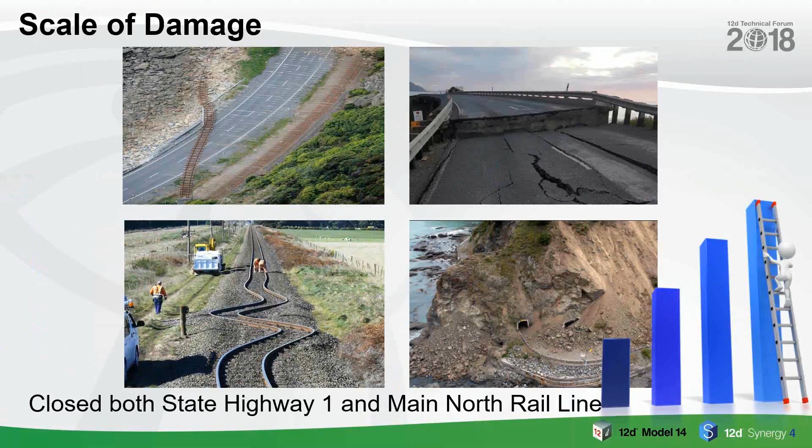You can see there just how much the railway lines were twisted, and down the bottom how the road and the rail tunnels were just decimated.

The response was fantastic. All the different groups came together to actually respond to the earthquake, and the North Canterbury Transport Infrastructure Recovery, or Nectar, was formed to look after it. It's a little bit like SCIRT from the Christchurch earthquake, except this time it was concentrated north of Christchurch. All these groups came together to form Nectar to actually do the redesign and rebuild.

They first built a village which could house about 300 people, with the ability to increase it, but there were about 5,000 people involved altogether.

They had to do things like cleaning up all the tops of the slips, clear away the slips, retain slips from blocked roads and rail, and repair and reconstruct the rail and road corridors. First they had to get these things open so that they could even start getting there to work on them.

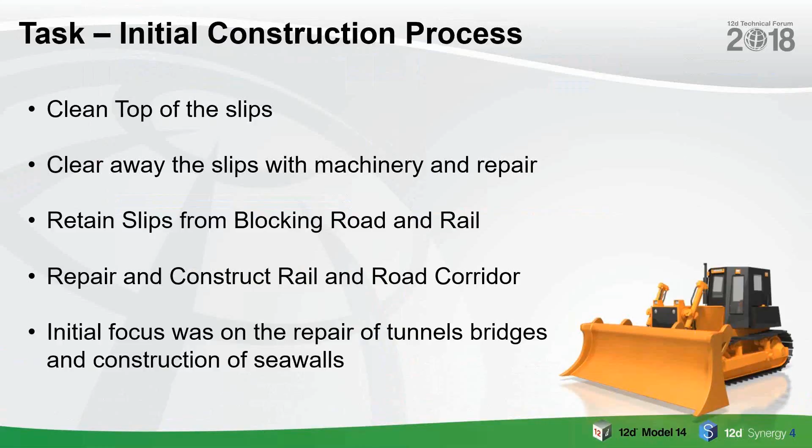Amazing sorts of things they had to do. And here's a clip to see just how hard it is these people had to work.

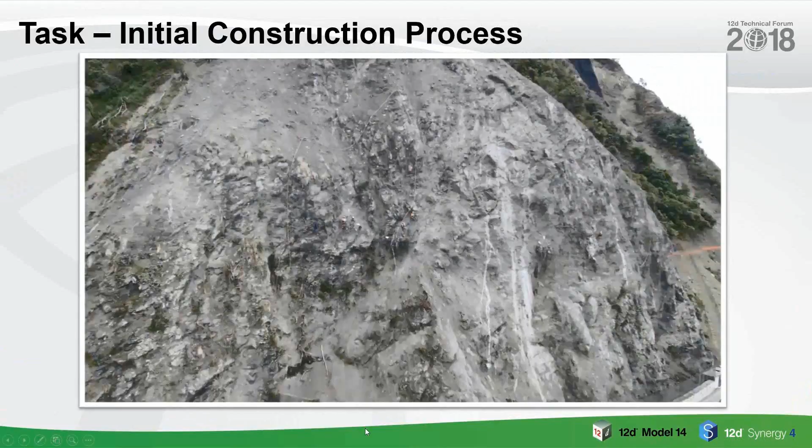So these are the sorts of things and hazardous ways they had to deal with just to start off before they could do anything. There were 200 areas affected.

700,000 cubic metres of soil to be moved, 30 slips. The main rail network was actually cut, and along that line there were 900 sites that sustained damage, including 20 tunnels, 59 bridges, and a whole lot of embankments as well.

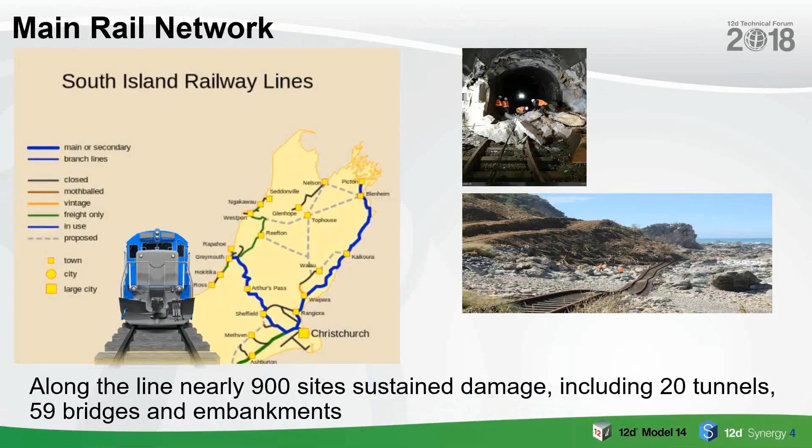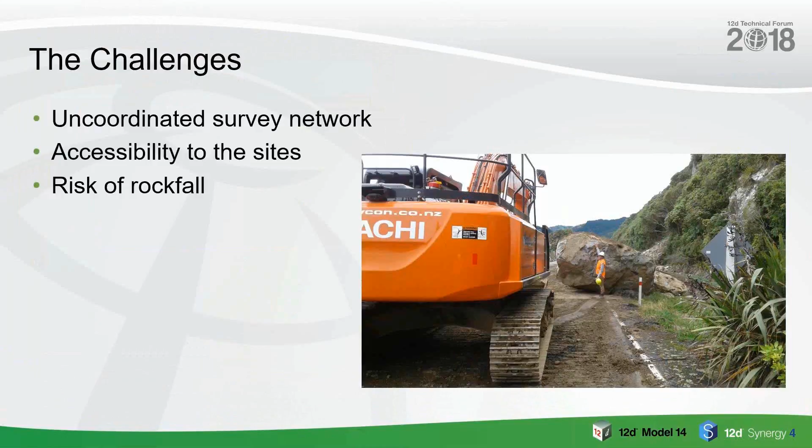You can see there just how bad the tunnel and the rail were. The challenges were basically uncoordinated survey networks, accessibility to the sites, the risk of rockfall on the sides of the mountains, how to actually capture the terrain to even plan anything, and how to manage and distribute all the data for it.

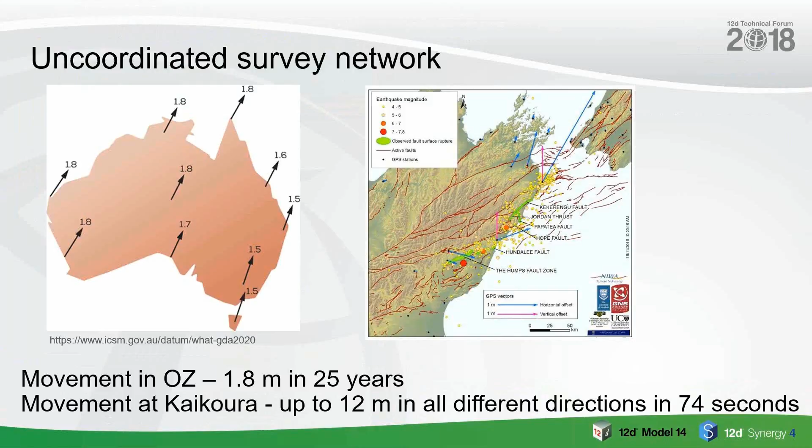For those in Australia, we talk about movements in Australia, and we've moved 1.8 metres in 25 years, that's with continental drift. At Kaikoura, they moved up to 12 metres in all different directions in 74 seconds. So that gives you some idea of the magnitude of the earthquake.

To capture the terrain, they used a whole combination of aerial laser scanning, traditional total stations, GPS, mobile laser scanning, ground-based laser scanning, hydrographic surveys, because a lot of this went into the water, and UAV photogrammetry. So they used the full gamut of tools.

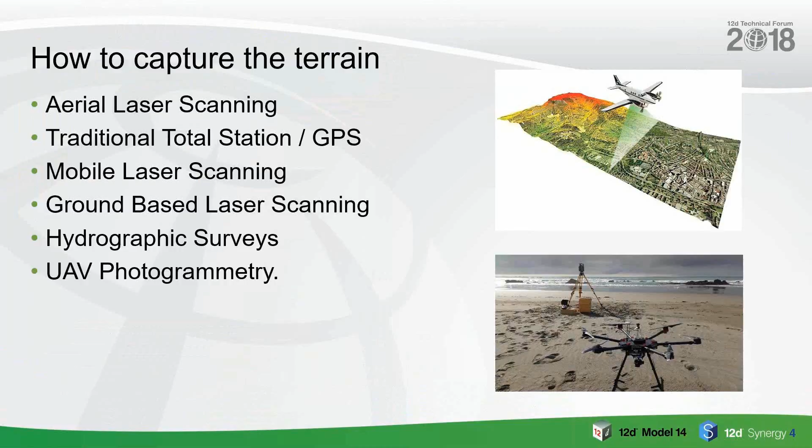There's a whole lot of examples of what they did, and they brought all this data into 12D model to model everything up to start the design.

As far as the data, they thought about a network drive, but it was difficult to use. It was remote, and you could not run a real DMS. So they actually chose 12D Synergy to manage and distribute all the data for the project.

They had the 12D model data, the Office products, AutoCAD drawings, and also PDFs. The Nectar Synergy system had 240 plus users, 1,200 jobs in it and this is ongoing, 600 odd 12D model projects, 1.1 million files, 1.8 million file changes on those million files, and 4 terabytes of file changes.

So it was a very large system.

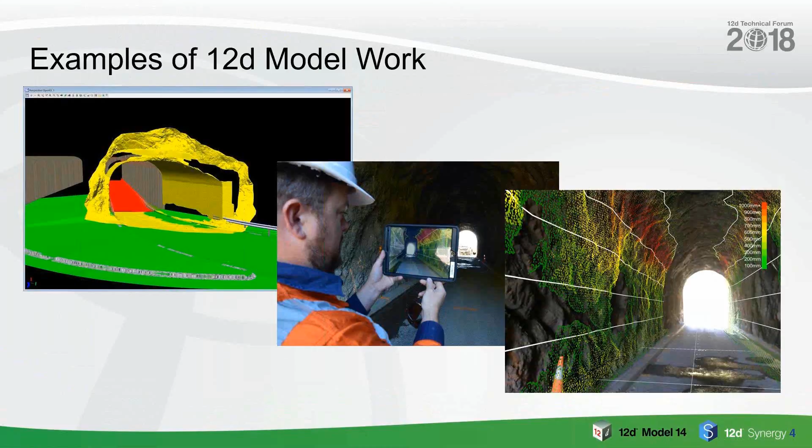The sorts of things they did is they bring all this data together and use 12D model to model and construct the jobs. Amazing things were done there.

An example here is just a fast bridge. It was the fastest multi-span bridge to be constructed in New Zealand, a 7-span, 144 metre Irongate bridge constructed from the ground up in just 14 weeks.

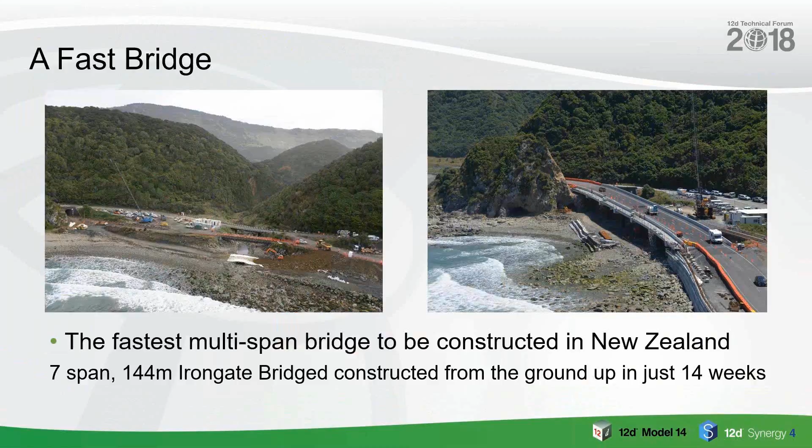At one point the NCTIR project was consuming all of the available cement in New Zealand. So it gives you some idea of the scale.

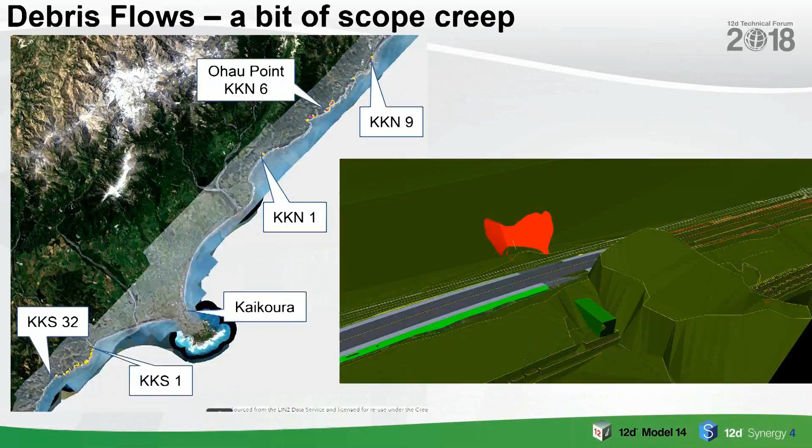On the administration side, all this debris flow down had to be modelled and allowed for. So a huge amount of data and material came down.

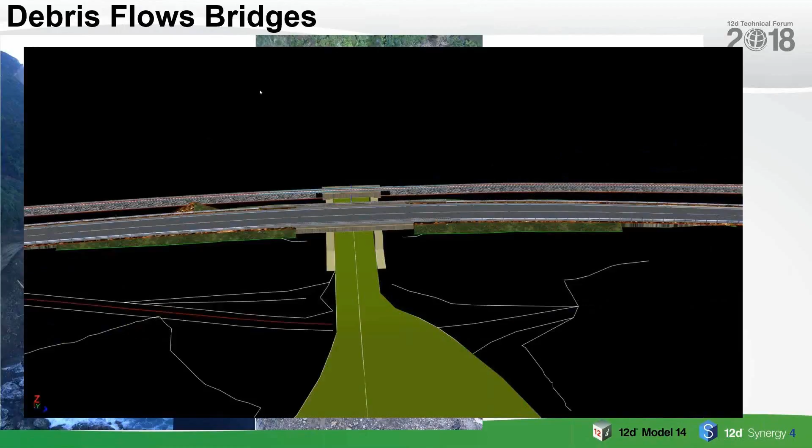They had to do a lot of flows for bridges just to make sure it wasn't going to happen in the future, because a lot of this rock and material was sitting there but was going to come down over the next 20 years. So that all had to be allowed for as well. So they modelled all these things up inside 12D model.

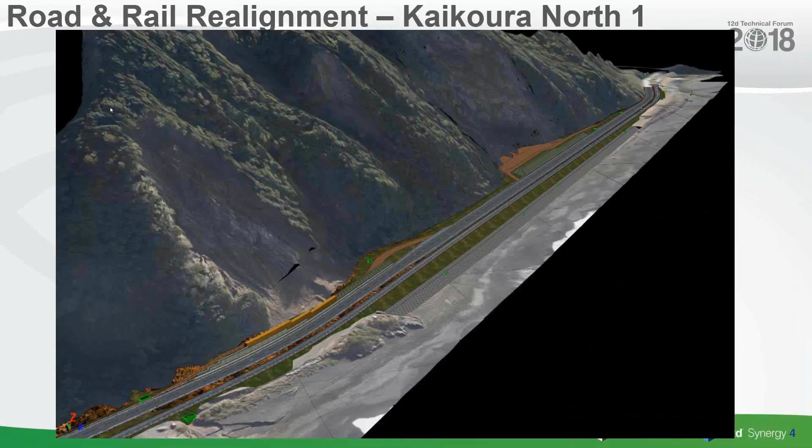The road and the rail were right next to each other at many points, so they all had to be realigned. And actually some of the rail was done first, so then the road had to fit in around it. So it was not an easy job. A lot of these things coincided and had to be looked at together.

Here's an example where you see you've got your road, then your rail, and then the ocean's just on the other side, and huge, huge cliffs.

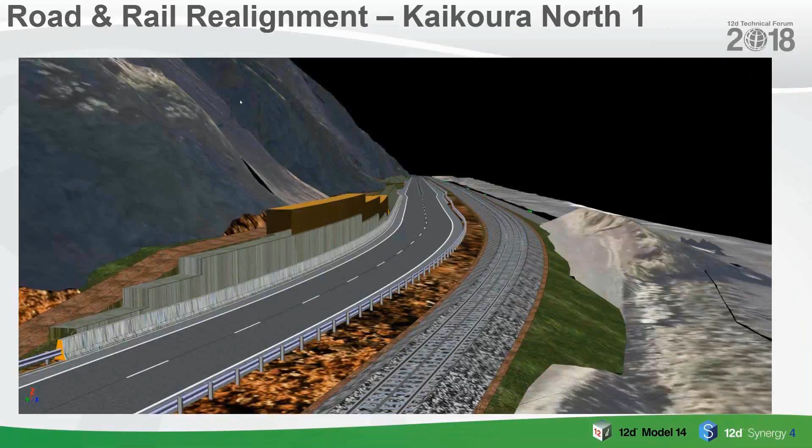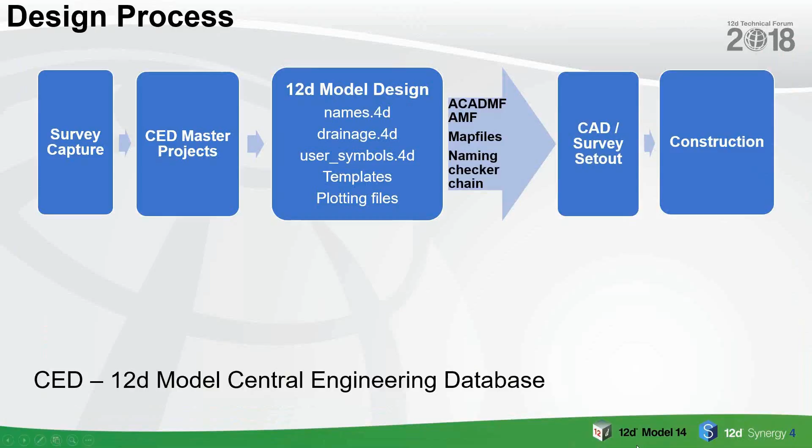For the project, they used what we call the CED master projects - the 12D model central engineering database. So all the survey went into there, and then the people doing their design were putting all their projects in and out of the CED master database. Using various things like mapping files, the data was going out to survey, to be set out, and then onto construction. So the CED central database had all the models, 12D model projects in it.

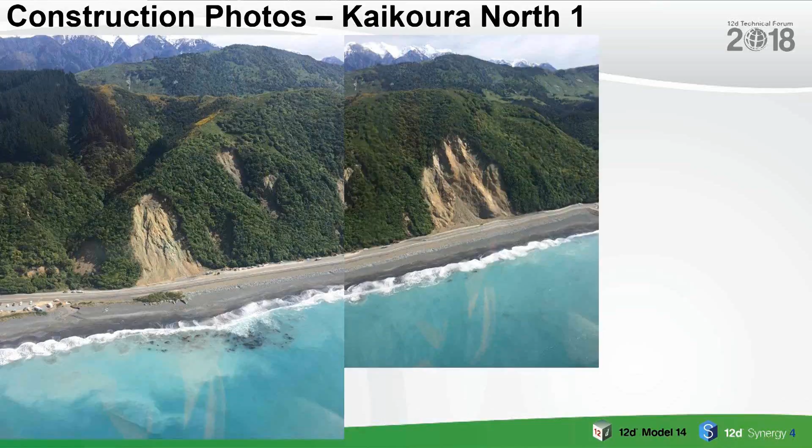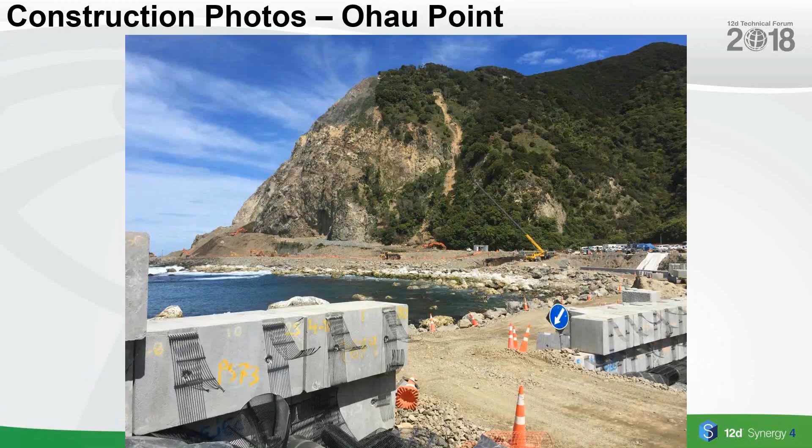Here's just a bit of a visualization of what they were actually working with - huge areas of construction. You can see some of these, where you can just see the size of the things down there and the people and dongas, just how massive it was that they're working on. So not an easy task at all, tremendous cliffs and things to work with.

So basically the earthquake was on the 14th of November 2016, and their big challenge was to safely open the harbour, road and rail for public access. On the 17th of September, the railway was actually opening and running again, so about just under a year later. The harbour was open on the 14th of November 2017, and on the 15th of December 2017, they started having traffic flowing on the main road. So it was a tremendous achievement in just over a year. But still, there's another year and a half to go of design and construction to complete it. So it's a massive, massive undertaking.

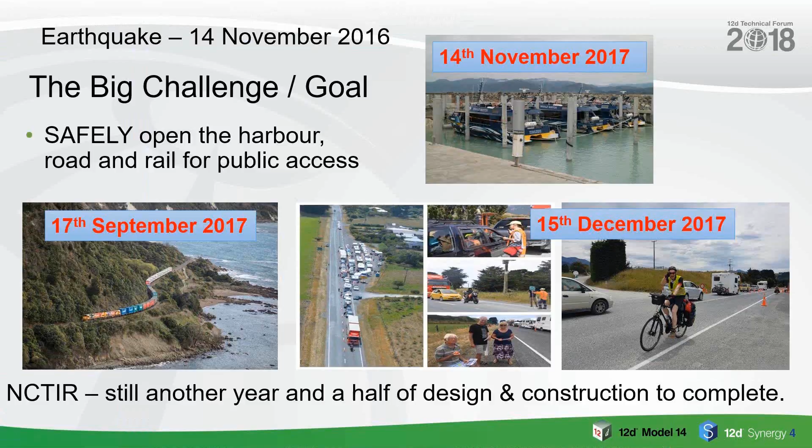It was a fantastic talk that the guys gave.

Throughout the conference, a lot of it was on using 12D Synergy 3, what's coming in 12D Synergy 4, and using 12D Model 12, and what's coming in 12D Model 14. You'll notice there is no 12D Model 13, so you haven't missed anything - we're jumping from 12D Model 12 to 12D Model 14.

A common theme was producing civil BIM models in 12D model. Many of the talks were around producing civil BIM models and how useful 12D model was for doing that, and how it's about the only civil BIM product that is really on the market. And using 12D Synergy as a single source of truth for all this data, as a BIM repository for not just the 12D model data, but all the other things that go with a project.

Richard Stollier spoke about what's coming in 12D Synergy 4. This is in the first session. For those who didn't know, Synergy is a data management system for the AEC industry, so we concentrate on that area. It has easy to use work sharing capabilities, and reduced transfer times with intelligent data transfer. So you're working local, we're backing everything up in 12D Synergy, so you really are cutting down on the network traffic by a huge amount.

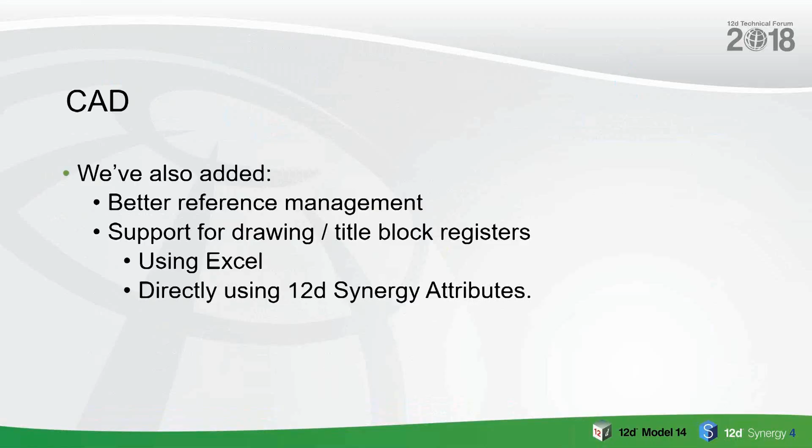In V3 we supported AutoCAD and BricsCAD, but now we've added Map 3D, Mechanical, Plant 3D and Civil 3D. We've also added support for more reference types, the sheet set manager and data shortcuts in Civil 3D. There's better reference management in CAD, support for drawing title block registers using Excel, or directly using 12D Synergy attributes rather than Excel.

There's a new workflow engine, which is all new for V4 - attributes so you can tell what stage a project is at, what revision a drawing is on, and so on. The workflow now allows you to model your business and day-to-day process and perform automatic operations. It's a point-and-click way of putting things together to let you decide what stage you can go to next and so on. People find that very, very useful for setting up things rather than just having to set attributes before.

Spatial maps: we could capture coordinates and things in V3, but now in V4 you can display maps using ArcGIS Online. So you can search for jobs using a bounding box, show surrounding jobs, pull in layers from external sources, and search for files near your current job. So you can actually see it there all on the screen, letting you know what's going on.

A whole lot of reports and gadgets, so things out of the box to show you license user activity, job details, file change information, and many more. You can also now schedule reports. So you've got these little gadgets you can see, so everyone can see what's going on straight away.

So basically 12D Synergy 4, it's smarter done smarter. We've taken a lot of the user feedback plus other things and added them in just to make it even better for you for the future. And with the CAD thing, we'll find a lot of people coming on board to use the CAD side of 12D Synergy, even if they're not using it for 12D Model.

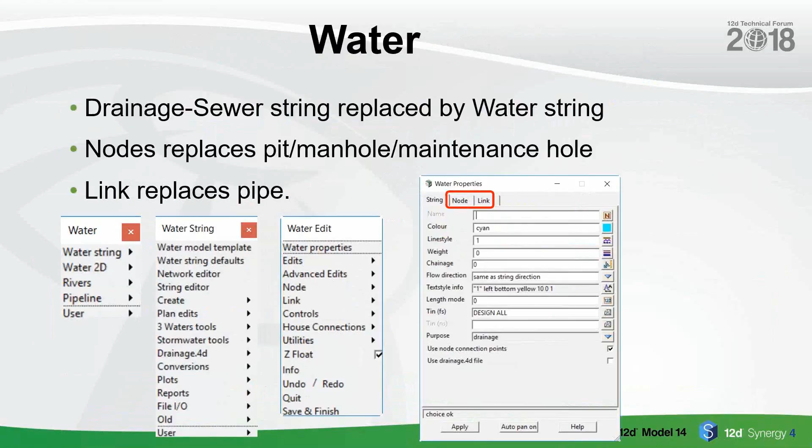With water, the drainage and sewer string has been replaced and called a water string, because it does the three things. And so you'll see that right through. The menus will be changing, and we're now using the word nodes instead of pit or manhole or maintenance hole, because there are things that just weren't covered by those. And link is replacing pipe, because it doesn't just have to be a pipe, it could be just a V-drain. So we've made that change of terminology just to make it easier to talk about things. So you'll see that right through all those menus.

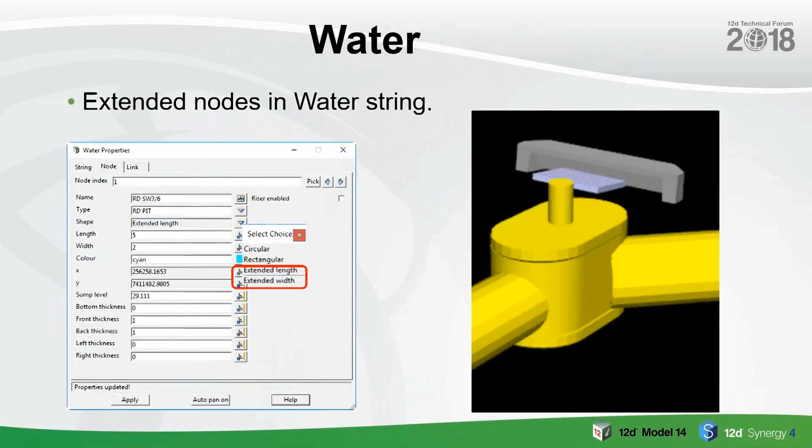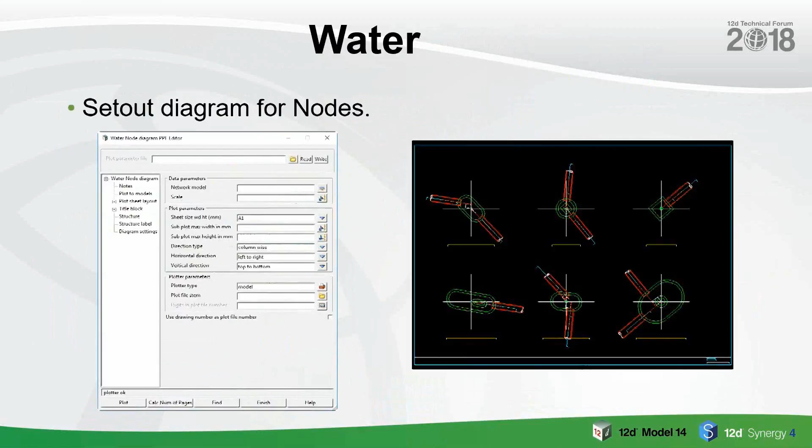We have extended nodes in water strings, so this is not just round and rectangular, but extended nodes. And we have risers for nodes in the water string. So you're now going to have a riser, so you can model it much more accurately. We have set-out diagrams for the nodes, so you can produce all those set-out diagrams you want for a selection of nodes or all your nodes. There are user-defined house connections and more settings for setting them. So everyone has been asking for that for a while.

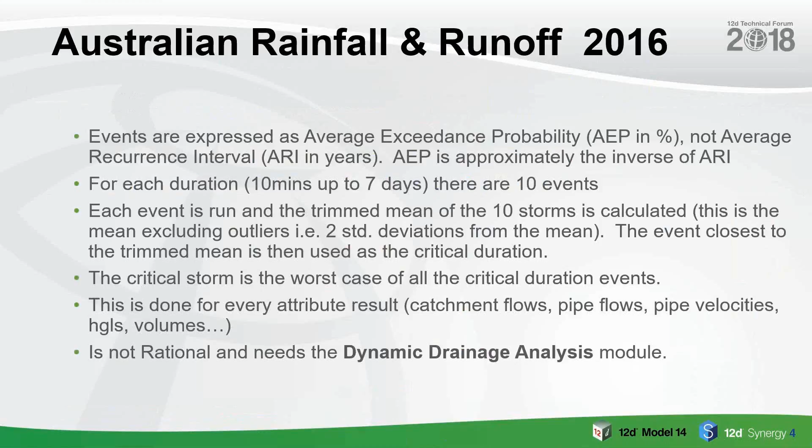We're supporting the Australian Rainfall and Runoff 2016, and most of you will know that if you're on maintenance, we actually pulled that back into 12D Model version 12 so that people can use it now. So if you've got C1 of version 12, you can run this now if you're on maintenance and have the drainage analysis module, that is. There's a new GPU usage for TUFLOW calculations, which can speed that up by like a factor of 10.

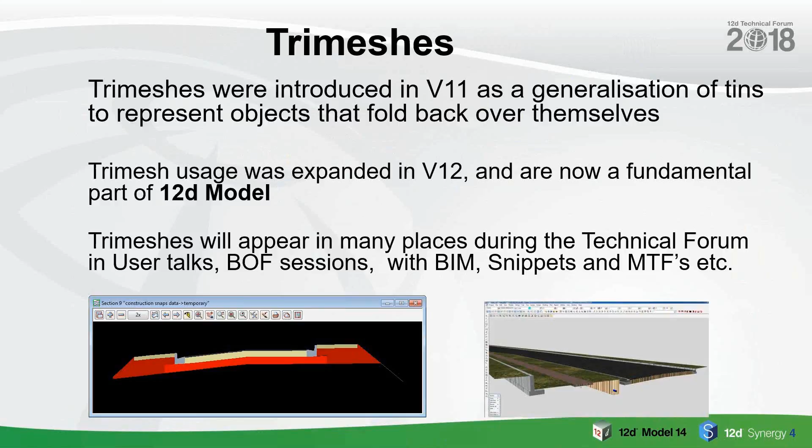Trimeshes, we introduced them in V11 as a generalization of tins to represent objects that fold back over themselves. And usage of trimeshes expanded in 12, and now they're a fundamental part of 12D Model. And in all the technical forum talks and other talks, BIM, snippets and so on, trimeshes are there all the time. So they're becoming a fundamental object inside 12D Model.

Because we have the trimeshes now with faces on them, we've introduced a new face snap. So you actually can click right onto a face. What that meant, we used to use F for fast snap. We're now going to call that quick snap and use a Q. So fast snap will now be called quick snap, and F will be for face snap.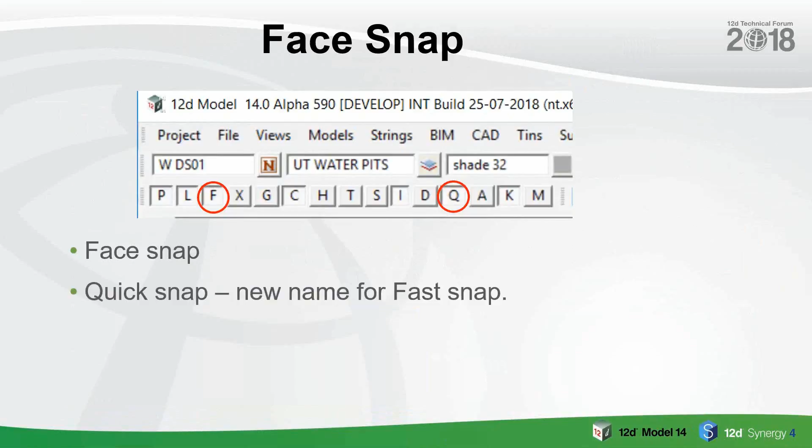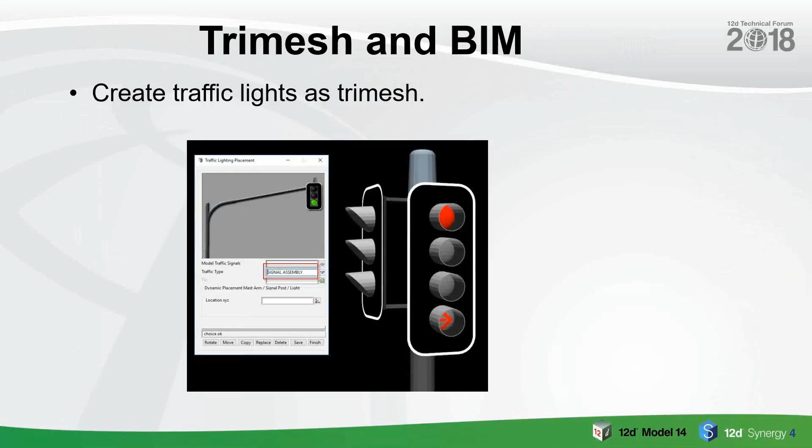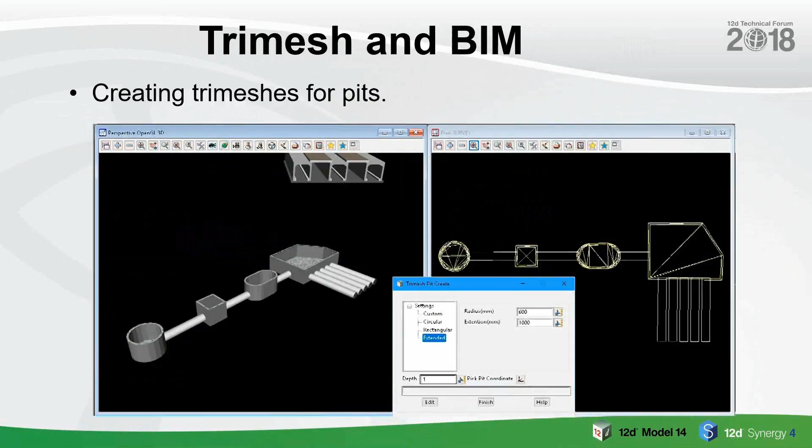For BIM, you can now create trimeshes for all sorts of things. You can do them as fences rather than extrusions. You can create traffic lights for them. Here's a case where we're creating trimeshes from a tunnel boring machine, the rings that are picked up afterwards from where it's going. Trimeshes for pits, for pipes, all sorts of things. Culverts along a string. A heap more things there of trimeshes for use in BIM or civil BIM.

And for tunnels, we had the MTF for producing tunnels. Now you can actually form the inner and outer walls of the trimesh as one trimesh. So that's, say, the yellow part. You can also have the inside of it for the volumes inside. So all these strings that make that are independently controlled in the MTF. And the commands can be for either vertical or perpendicular to super alignment, which is super important. Most systems don't allow that.

And we also can have invisible faces in there, so you can have it still closed even though it looks open, so you can get a volume for the inside, say, of the tunnel. And you can have invisible faces so you can see into the side passages and things. So it's really much, much easier to do proper civil tunnel work.

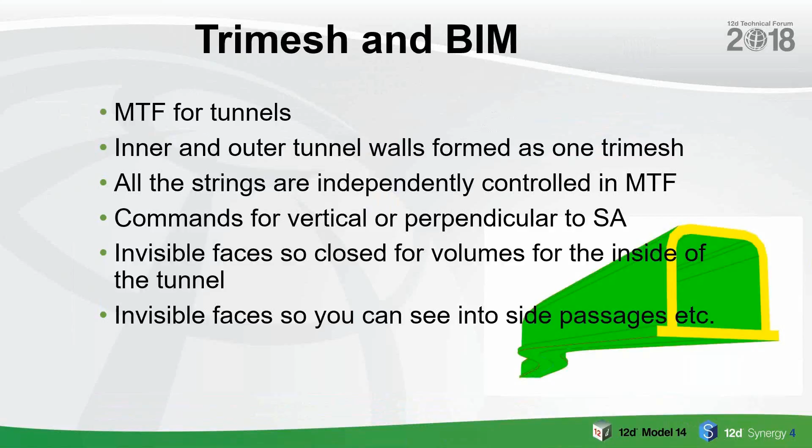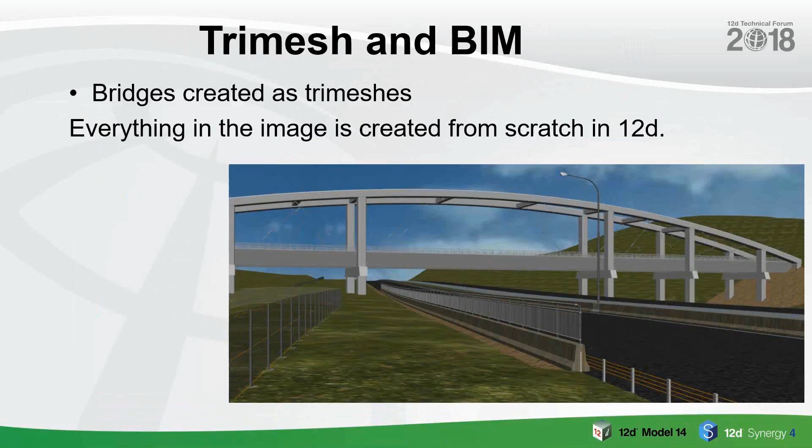Bridges can be created as trimeshes. In fact, everything in this image has been created from scratch inside 12D Model, either trimeshes, extrusions, or tins, and so on. So there's very little that you can't create in a civil BIM job inside 12D Model.

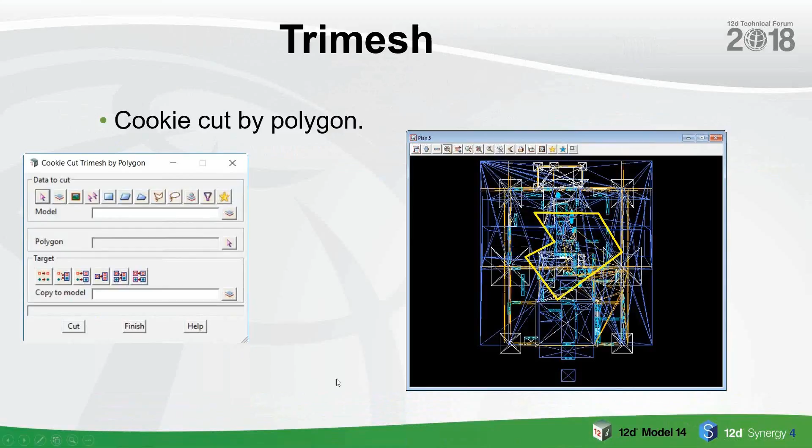There's also a Trimesh Editor, so we can edit vertices, edges or faces, so you can add, delete, move, make invisible and so on. There's also options in there for the union of trimeshes, the intersection of trimeshes or subtracting trimeshes one from another. A whole lot of things on trimeshes.

Another big thing there is project settings. This takes a lot of the things we had for defaults, water defaults, the things that started for a new project that you set up once at the new project, but then you save them away with each individual project. So they've all been brought together into the one place called project settings to make life much easier for you.

And in the case of the project settings, you can have files of them, so you can change it at any time. So you might have project settings set up for survey or design or water, and so you can change to those settings at any time within a current session of the project.

We've also combined the 12DA and 12DXML readers and writers, and they're now up on the file IO menu right at the very top. So you no longer have to hunt them down in two different places. They recognize, and you can say which one you're writing out, as well as all the zip ones, and it looks for them when you go to read them in. And also there's these anonymous functions. You can now set them right there on most of these read panels, whether you want an anonymous function for them or not. It's not just one environment variable.

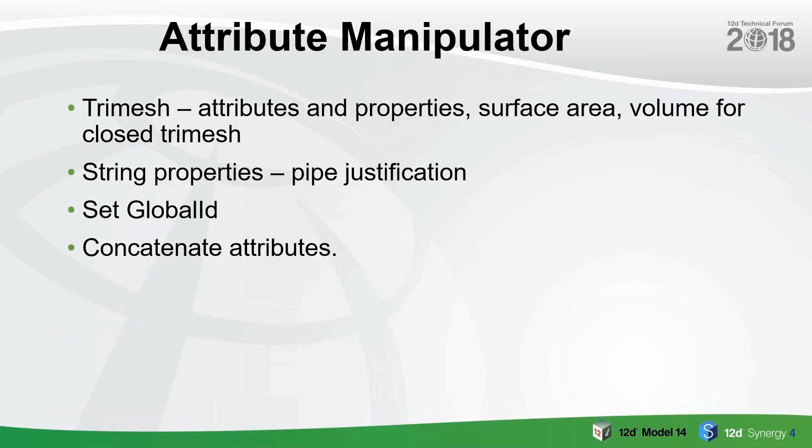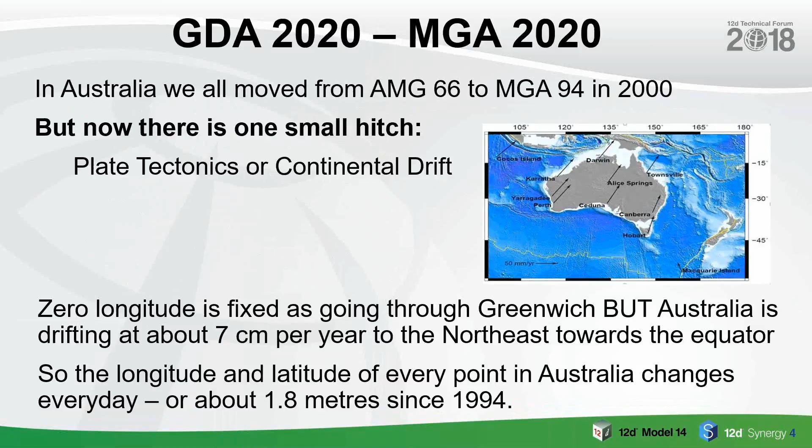A big thing in Australia and the rest of the world is, of course, we're moving from MGA, which is now MGA 94 we had in 2000, then because of continental drift, all our longitudes and latitudes are actually changing, because they all go back to Greenwich as a 0 for the longitude. So basically all our coordinates for longitude and latitude, hence also our eastings and northings, are going to change, because we moved about 1.8 metres since 1994. Well, we've actually got this in there for version 14, and if people are on maintenance, then we're going to make it part of the base, because everyone's going to need it.

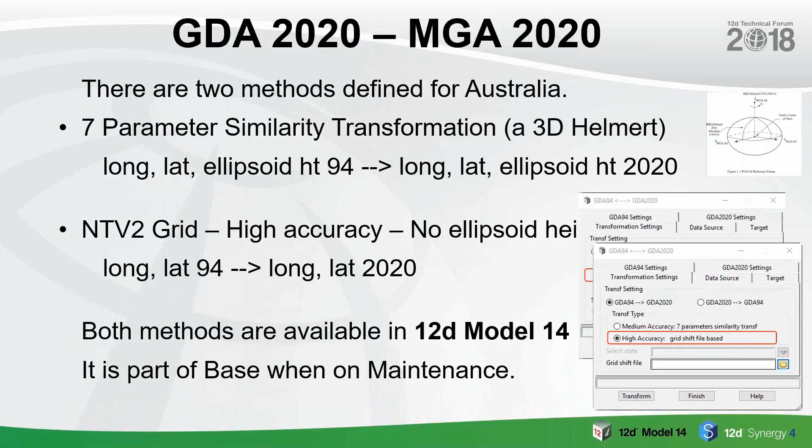So there's two methods, I won't say too much, but one's called a similarity, 7-parameter similarity transform. It's a type of 3D Helmert, and it knows longitude, latitude and ellipsoid height to be able to convert it. But there's also what's called an NTv2 grid, which is high accuracy. It doesn't use ellipsoid height, and it takes just a longitude and latitude to give you the new longitude and latitude in 2020. So both methods are available in 12d Model 14. And as I say, if you're on maintenance, it'll be part of the base. If you're not on maintenance, it's part of the survey module.

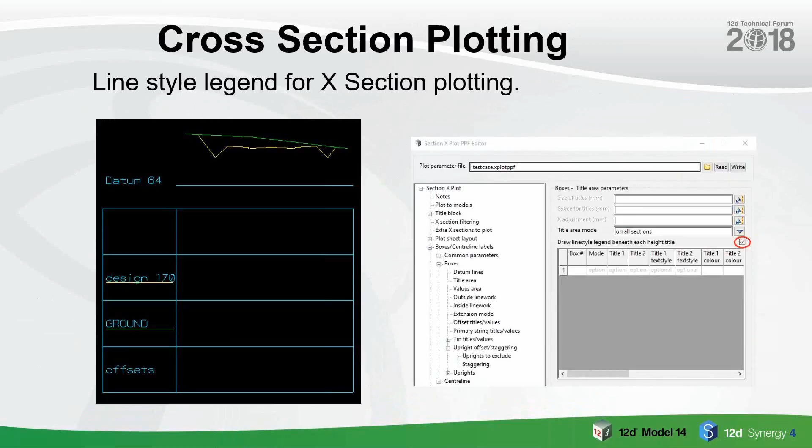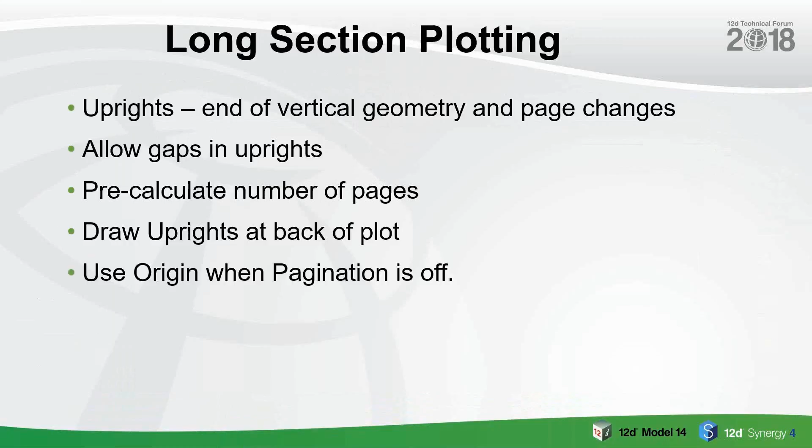We've done a whole lot of things on the plotting, legends for line styles, upright gaps on long sections and cross sections, so you can use gaps in there for text you want to write. A fixed datum for cross sections people are asking about. And for all of these, you can pre-calculate the number of pages before you plot to see how many there are. You can draw uprights at the back of the plot, so everything else is drawn on top of it. And similarly for the long sections, there's a lot of other things as well, but basically very similar sorts of things. So a lot of things you've asked for.

In the PPFs, because we can calculate the number of pages before we go, we can have a dollar end page number. So you can say 1 of 20. It'll automatically calculate it for you. So we've added a lot of things to look at attributes, model attributes, string attributes, project attributes, and you can have multiple time formats in your files. So it makes it much, much easier.

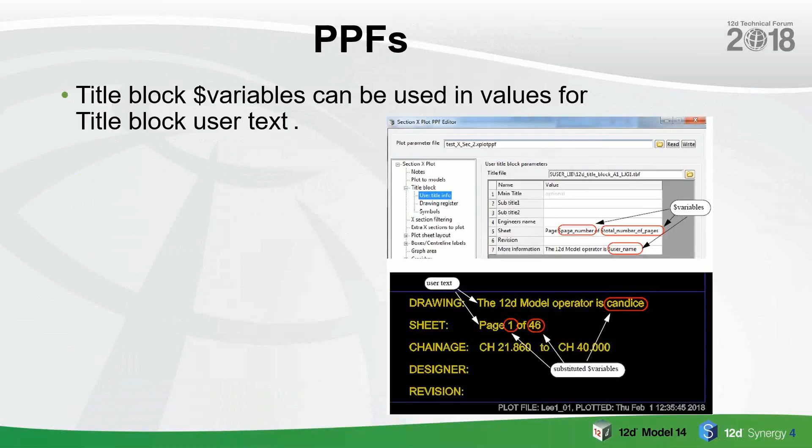In fact, in your PPF itself, where you put in values for your title block, you can actually use dollar variables in there. So you don't have to go into the actual title block file itself. You can actually pass these through if there's something already in the title block file that takes a bit of text. So it makes it much, much more flexible.

We've got a new perspective PPF. This allows you to plot a perspective view, and you can do two things, and both together if you like. An image of what's on the perspective view, so it's like a 2D image, or you can create a 3D PDF. And of course, that's only if you go to a PDF. And it's got margins, user-defined title blocks, whether you use a view or a view favorite, background color.

And you can also set a high res factor. People might be aware of this, but you can do this now for a perspective OpenGL view or a plan OpenGL view, where it actually will make it a much higher resolution than what you see on the screen.

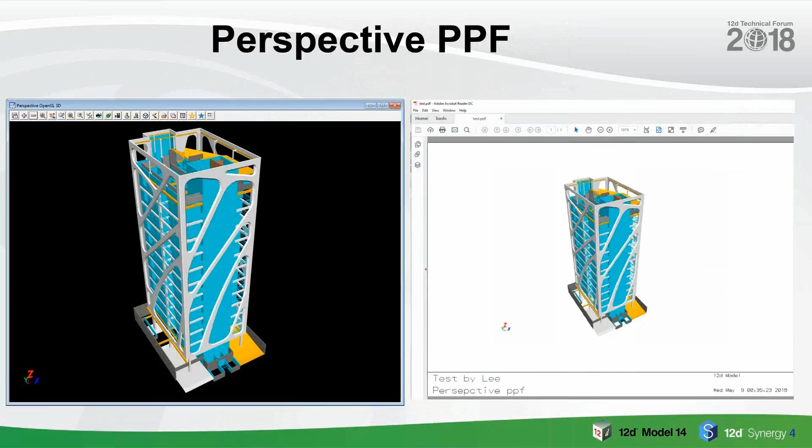And so you can do it here, so if you want to then blow your plot up, if you're doing an A1 plot, here's a very high res image. So here's a perspective PPF of, say, an image. On the left, if you see a 2D, you just see what's in the frame. On the right is a 3D PDF. And if you've got that, then inside the PDF reader, you can start rotating the building and so on.

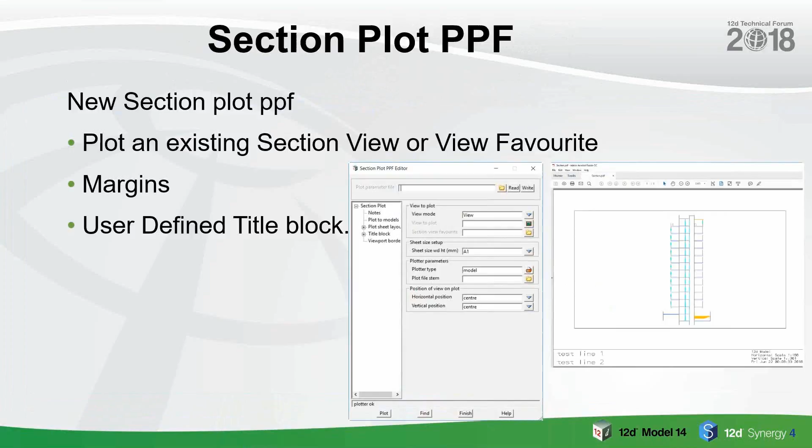We've also added a section plot PPF, and so this is just plotting what you see on the section view. So not like long sections and cross sections, exactly what you see on the section view. And again, it's got margins and user-defined title blocks. So all the sorts of plots you've got there are now available. And we've got a node diagram plot PPF to do the water nodes. So again, that's there so you can make pages and sheets and things and control it all.

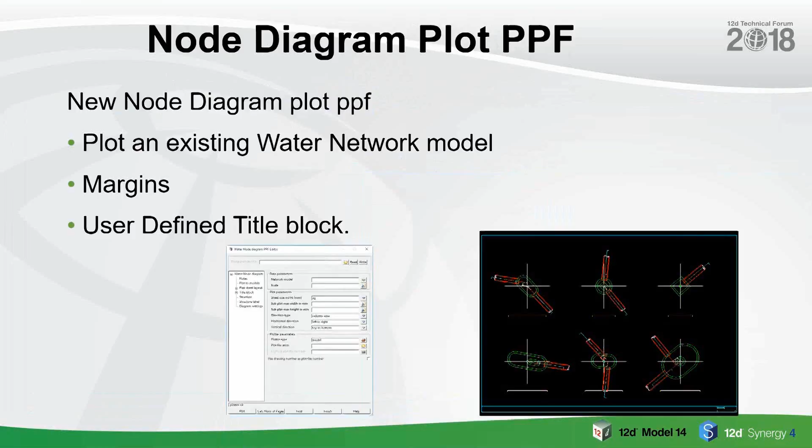Another thing we've done for version 14 is we've totally rewritten the MPS. So we no longer use the word sheets, and it's basically the old MPS in V12 on steroids. And it's called multi-page plots is what we now call it. And basically things are broken into a book, page and chapter, so you can group things together, and so you can do something at the book level that applies to everything underneath it.

And also there's special chapters in there where you don't know how many pages there are. So there's a special chapter for cross-section PPF. And so you then give your start and end chainage, and it automatically works out how many pages it's going to need. And it also takes care of that inside the total number of pages that you've got. So you can have long cross-section PPFs, long section PPFs, drainage plot frames, and node diagram PPFs. And so for that chapter, it'll work out how many pages there are and keep total of the whole lot.

We've beefed up Super Inquire, face snapper's now in there, creation date of elements. Again, what people want for Super Inquire, just let us know and we'll put it in there. And for a lot of people, surveyors mainly, when you tap on the panel, it's taken as an accept. So just let us know what you want there. I think for version 14, the Super Inquire will probably be the default one, which it wasn't in version 12.

A lot of extra things in chains. Again, you just keep coming back to us about what you'd like and we'll add them into the chains. So there's a lot of things for checking whether things exist, to write out view favorites and view positions and so on.

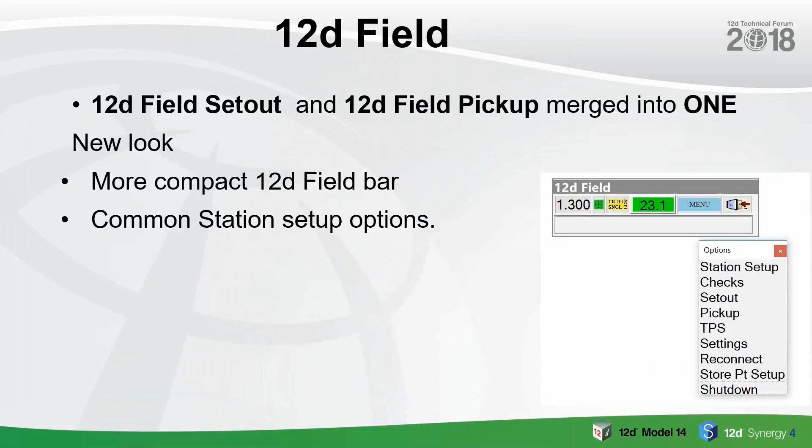BIM has been the one, we learn more about it every day. I mean, anyone who says they know everything about BIM, I don't think that's true, but we're learning more and putting things in there as you get more experience with it and we get more experience with it. ADAC, which came from the IPWEA, is actually a BIM system. People don't realise it, and anyone who supports ADAC properly, so they only use the ADAC XML file as the one source of truth, they're moving down the road of doing a full BIM system.

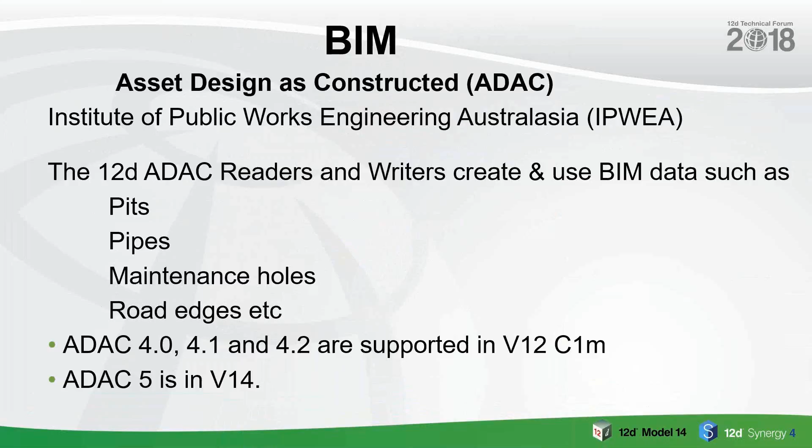And for version 14, we'll support ADAC 5. We've already supported 4.1 and 4.2 in version 12 C1M, but now ADAC 5 is in V14. With BIM, the tri-meshes go out to BIM, all of the extrudes, or most of them, go out to BIM, and we've got the 12D tri-meshes from 12D objects for things where it's not quite so easy to make a special IFC item out of it. So all this data now can be put out to BIM.

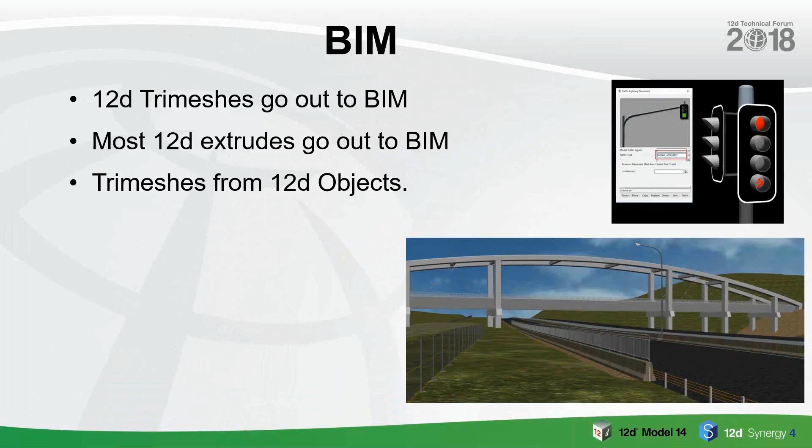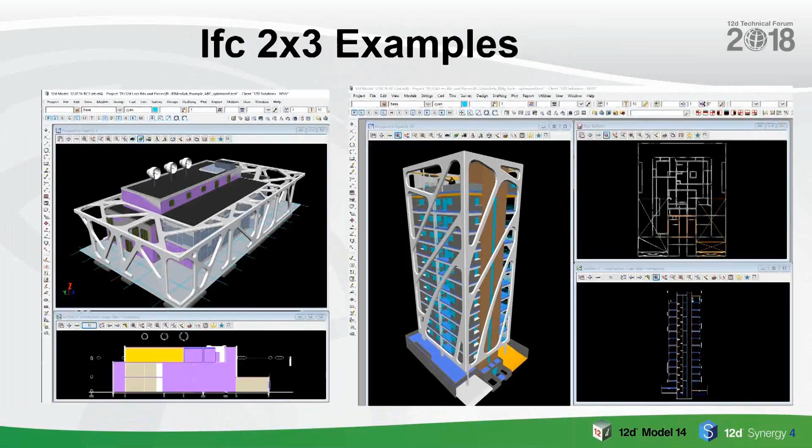And we put this in 12, the IFC 2x3 STEP reader. STEP is just a particular format. There's STEP and there's XML. And anyone on maintenance was able to get that in version 12 C1M. And we've actually done a webinar on that, and we are running training courses. So that was something for 14 we brought forward to 12 because we found people need it right now. And we've read in a whole lot of examples. These ones are from ArchiCAD, being from a variety of products.

In there, people didn't realise that the IFC does have things like attributes like 12D. They're called property sets. There are special ones that they have, which are called P sets, and there are other ones which you can define yourself. So property sets, P sets are a special type of property set.

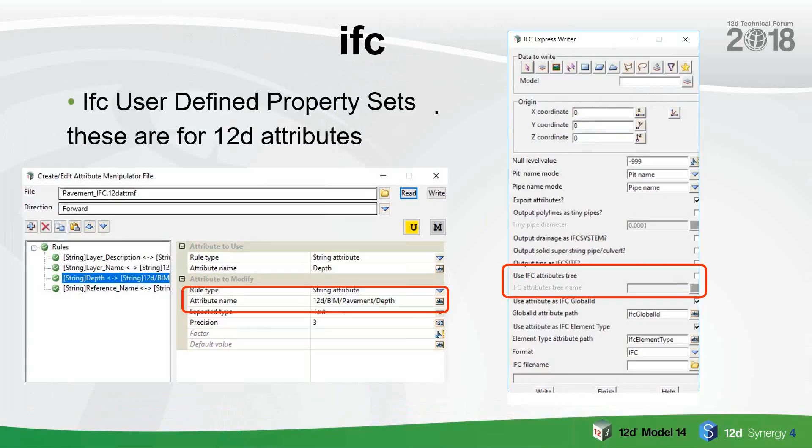And basically in 12D model, you can group things together to go out to named user-defined property sets. So you set them up using attribute manipulator, and then they go across. So you're able to do all that sort of work with user-defined property sets from 12D model. And you can then send them out to products like Solibri. You can see there it's got a tab called 12D model and pavement. They were two user-defined property sets of data we sent out to them.

Global ID is also one thing they've got, which we don't use very much in the civil world, but it's a special thing that's unique in space and time. And now when we write data out to a BIM file, an IFC file, we retain the global ID. So if you reuse the data, it can keep that global ID.

In civil work, we tend to use string names. Everything is given in types of string names, but in the vertical BIM world of buildings, they don't have such a thing. So they've got this unique thing they use to track data, but they're horrible long things, 16 characters alphanumeric long, and so it's much easier to talk about something as being RS01 or George Street rather than this horrible long name. But you need it to work with a lot of the vertical BIM systems.

We're also now working towards this: a lot of the data we put out had to be just arbitrary BIM data, but now you can set an element type and we can write that out. So we write it out, say, as a wall or a window or a door, those sorts of things that we can now set. So when they go into another product, they know exactly what it is. Obviously, there aren't many things in straight vertical BIM that apply in 12D in the civil world, but as BIM and IFCs move forward, a lot more things are going to be introduced.

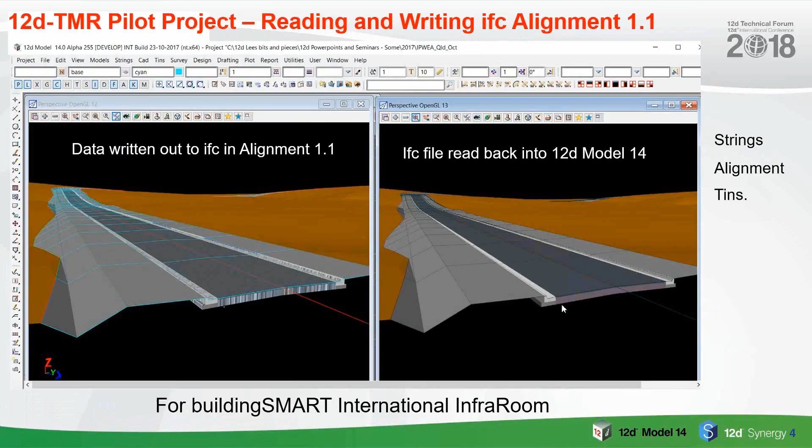And here's a pilot project we did with TMR on reading and writing IFC alignment 1.1, as it's called, where we've written data out for an alignment and then read it back into 12D model. So not everything can work, but it does take strings, alignments, and tins, but not super tins. So there are things missing, but it's going a lot better than the IFC that everyone's using today.

Another thing we're introducing for 14, so this is almost the last thing, is a thing called model tree. It works for models, tins, and functions, and this is where you can actually have more like groups of things. So not just a model name, we can say things like stage 2 concept 4, apply road 1 design triangles. So you can actually group things together and add things to the view and remove things from a view by a group.

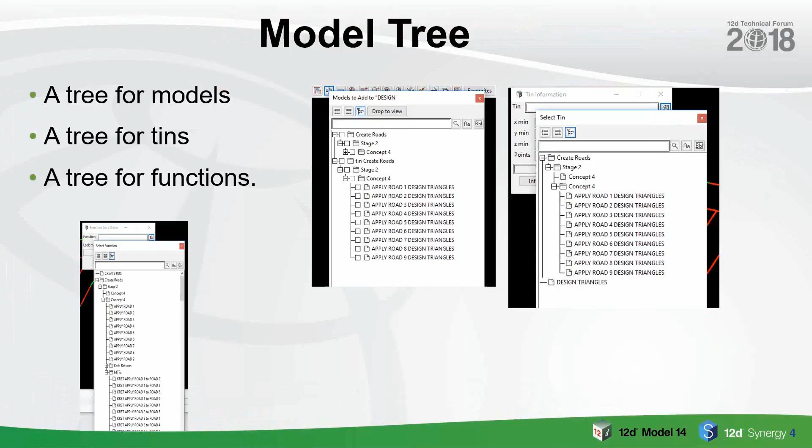Obviously then we can no longer use the model name as the name of the .model file in the project on the disk, so then we have to use a special thing. So it's not as easy to see what your models are when you just look inside the project, but that's probably a good thing because then you don't think of getting your little hands on them and wrecking them.

Finally here, we're allowing in version 14 a user-defined main menu. So you can define all the things on the top menu and what's in sub-menus, so you can make it look however you like. We've always been a bit scared of this because how do we support it and train it? But we'll do that in all our standard menus, and we'll have a button to get back to the 12D Model 14 menu.

So when you talk to us on support questions, you'll be able to say, oh no, this is where it is on our standard menus, because your menus may look totally different to us. So that button to show what it looks like on 12D Model 14, that's our sanity button for our support team.

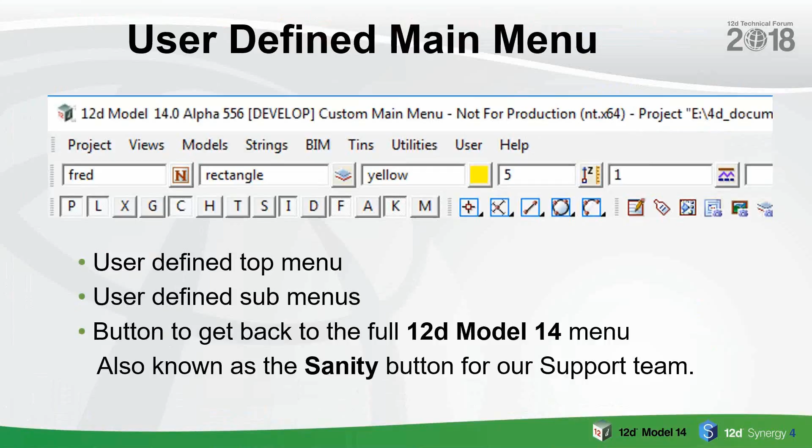There's also now, where before you had to go to places separately, we've got things for help. The documents there, the PDF, our reference manual which is also our online help, but also the programmer language manual, the what's new summary, and the getting started guide for design and surveying. They'll be installed with 12d Model, but you'll also be able to get access to all those PDFs from the help menu. And of course, everyone should know about our 12d Model forum.

That's going to be open to everyone on maintenance. We're posting questions, you can get help and get macros. And for all those people who were at the technical forum for the 3 days and are on maintenance, that's where we'll be posting the version 14 technical preview version, so you can get access to it and start having a look and play with it.

Also, the webinars and YouTube videos we put out, there's over 500 videos there. We'll be having webinars on the new features in 12d Model 14 and also 12d Synergy 4. There'll be more training videos, more training courses, as well as the webinars, so let us know what you'd like to hear in that area, because we'll keep going on it.

So a lot of the material for the coming things will be given, not just in this quick thing, but as webinars for you, and then they'll be posted up as YouTube videos. Most of the talks in the main room of the conference will also then be posted over time as we get them back and filter them. They're huge, so we have to chop them down to fit them on YouTube. They'll all be posted, so you can go and see most of the main talks from the technical forum.